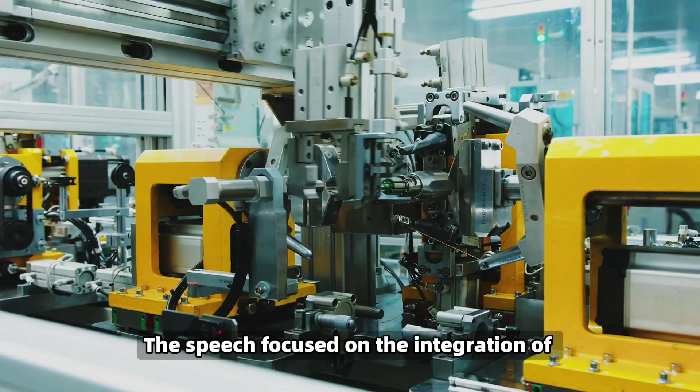The speech focused on the integration of industrial collaborative robots and AI technology, analyzing the challenges facing the robotics field and the development opportunities brought about by the demands of various industries.

Since then, Professor Kosuge has continued to expand in this direction, extending collaborative robot technology from rigid industrial assembly to the more challenging field of flexible manufacturing.

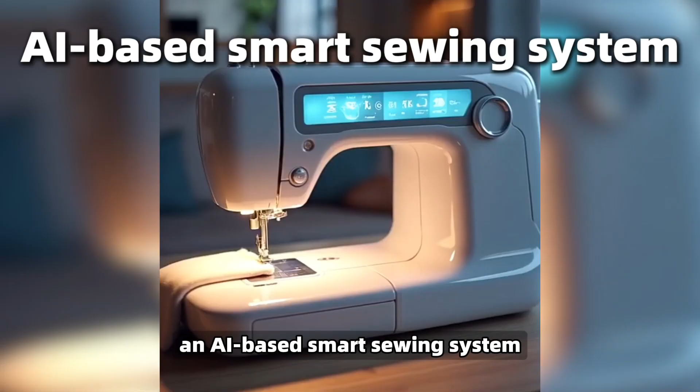At the upcoming GAIR 2025 summit, Professor Kosuge will present his latest research findings, an AI-based smart sewing system. This research continues his team's deep understanding of physical human-robot interaction and aims to solve the labor shortages and automation

bottlenecks facing the global garment manufacturing industry. The sewing robot developed by Professor Kosuge demonstrates several breakthrough technical features.

First, the system employs a fixture-free 2D sewing technology, using AI algorithms to automatically sew parts of 2D garment while keeping the fabric smooth and wrinkle-free.

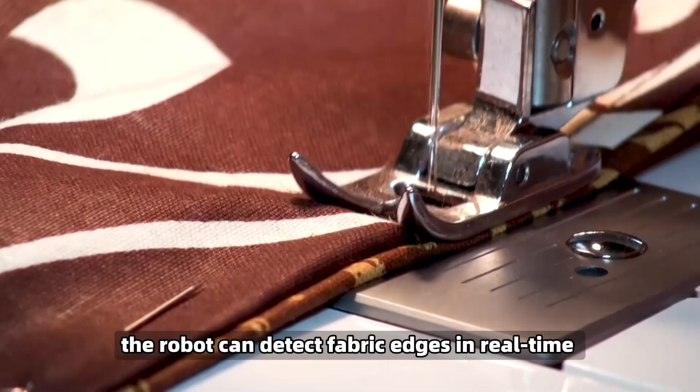Second, through an innovative mechanism and optical sensors, the robot can detect fabric edges in real time and precisely control the sewing direction. Third, the system can be used without programming, allowing for rapid switching between different styles, sizes, and

fabrics without the need for large-scale changes of molds or fixtures, making it particularly suitable for high-mix, low-volume flexible production.

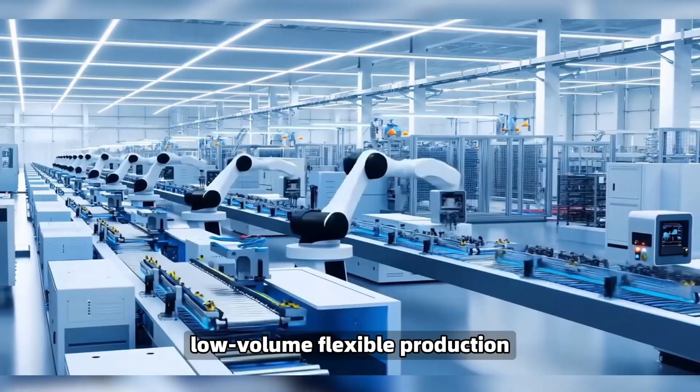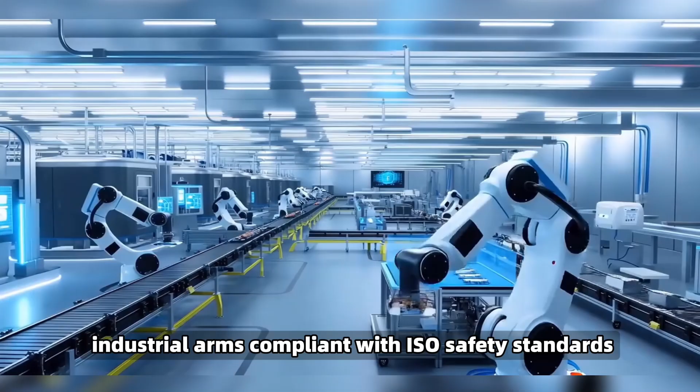Finally, as a smart system for handling soft materials, its core sewing mechanism is enclosed within the machine, while external collaboration is performed by industrial arms compliant with ISO safety standards, ensuring safety in human-robot coexistence.

On the eve of GAIR 2025, Leiphone interviewed Professor Kosuge at the University of Hong Kong. The former IEEE RAS president chose to move to Hong Kong 4.5 years ago, recognizing its unique position as a hub connecting global innovation resources with the global manufacturing ecosystem.

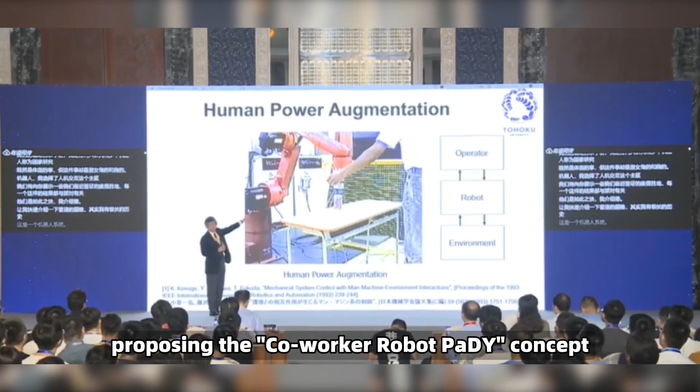In the 6 years since his 2019 opening speech proposing the coworker robot PaDY concept, his team has finally transformed the vision of fixture-free flexible manufacturing depicted in that speech into a tangible, quantifiable, and commercializable technical entity.

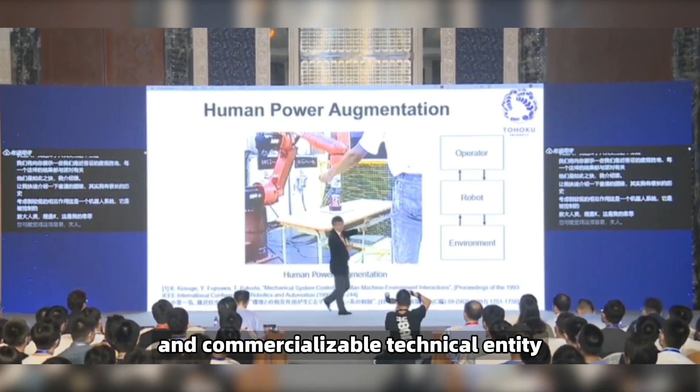During the robotics session at GAIR 2019, Professor Kosuge used a comparison between the bustling streets of Shenzhen and the prediction curve of an aging population to reveal the sharpest contradiction of that era.

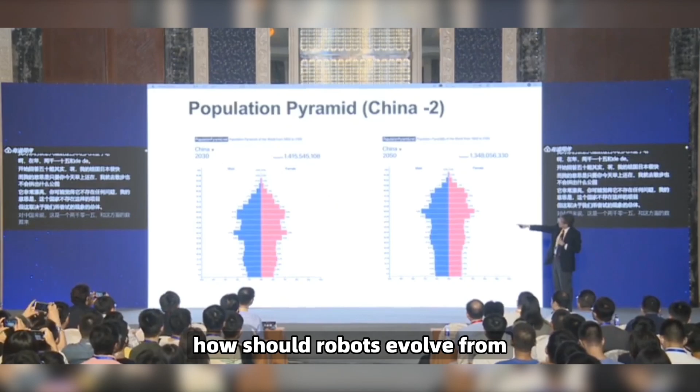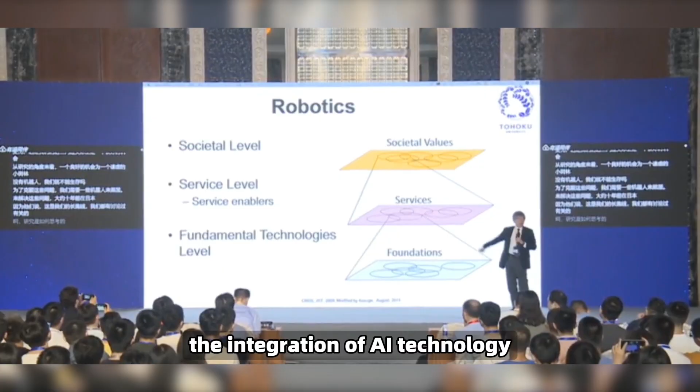When labor shortage becomes an irreversible social trend, how should robots evolve from cold automation equipment into true partners? At that time, his answer was PaDY, an industrial robot framework designed to achieve human-robot collaboration through the integration of AI technology. The core argument of that speech was insightful.

The value of robots should not be limited to replacing repetitive labor, but should reconstruct the future of manufacturing across 3 dimensions: individual empowerment, social value, and international competitiveness.

6 years later, these concepts of programmability and environmental adaptability have taken a concrete form in Professor Kosuge's latest research. But this time, he aimed the technology at garment manufacturing, a field recognized by the global robotics community as the

ultimate challenge in soft material handling. Professor Kosuge explains that the difficulty with soft materials lies in their infinite degrees of freedom.

Before sewing fabric, one must first smooth out the cloth and place it in the proper position, which is also where previous sewing robots struggled.

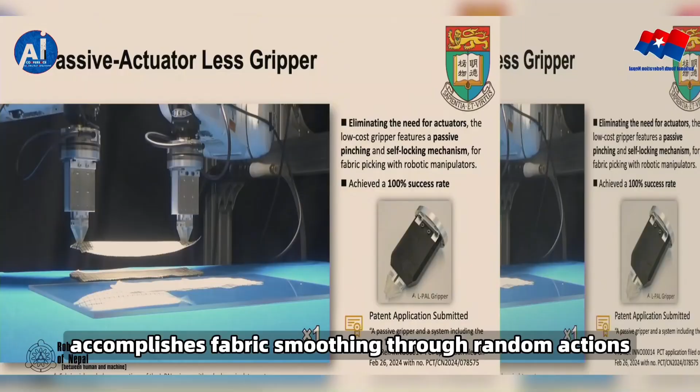Professor Kosuge's sewing robot, however, accomplishes fabric smoothing through random actions. This is a stochastic process, and as the system is trained, they eventually learn how to smooth out these fabrics.

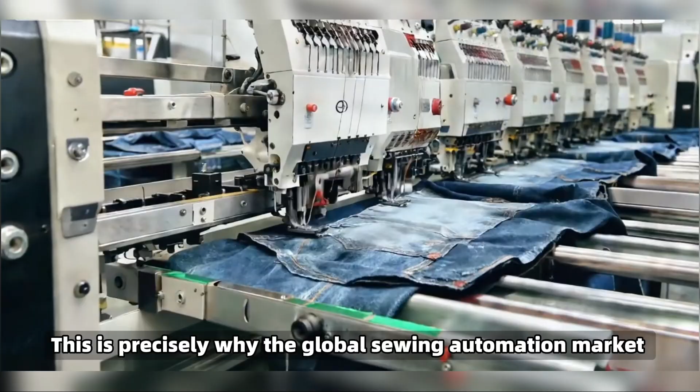This is precisely why the global sewing automation market still hovers at a single-digit automation rate in 2025.

Professor Kosuge's team found in their research that even established industrial sewing giants in Germany and Japan rely heavily on template programming for their solutions.

Even for high-value-added products like car seat covers, engineers need to spend weeks debugging trajectories, and the cost of changing fixtures remains high. In contrast, at efficiency-first contract factories in

Dongguan, the first sample of the same product might be completed in just a few hours. Based on this, Professor Kosuge defined the goal of the Sewing DX project to research and develop key technologies for fixture-free and training-free operation in sewing and fabric processing.

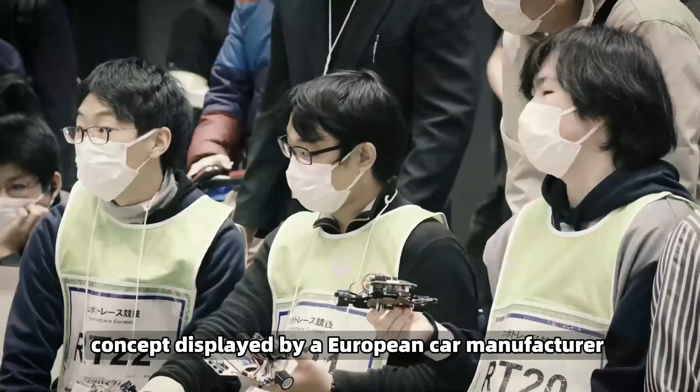In 2022, when Professor Kosuge saw a smart cockpit concept displayed by a European car manufacturer at the International Robot Exhibition in Tokyo, he realized that car seat covers might be the best entry point to break this paradox.

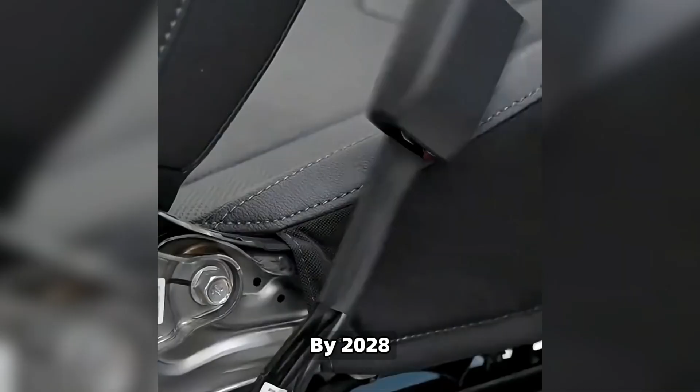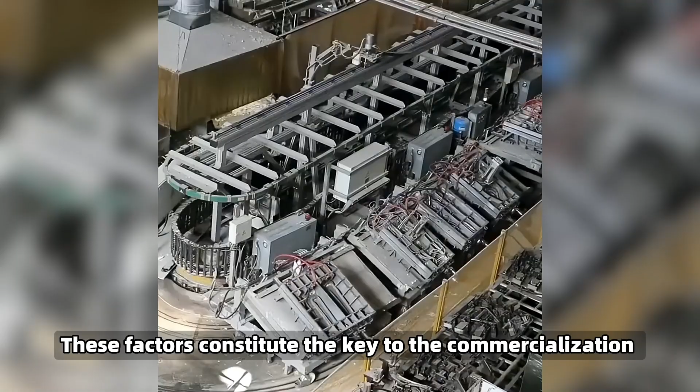By 2028, the global automotive seat market is expected to approach $3 billion, with the sewing equipment market alone reaching $363 million. More importantly, car seat covers have three unique attributes: high production volume, high product value, and complex 3D curved surfaces that maintain regularity. These factors constitute the key to the commercialization of Professor Kosuge's sewing robot technology.

In the demo area, Kosuge first showed their new gripper, a seemingly simple passive end effector called PAL grip, which embodies a disruptive design philosophy.

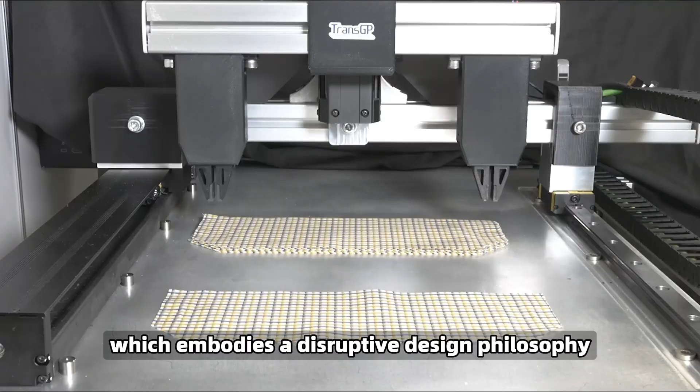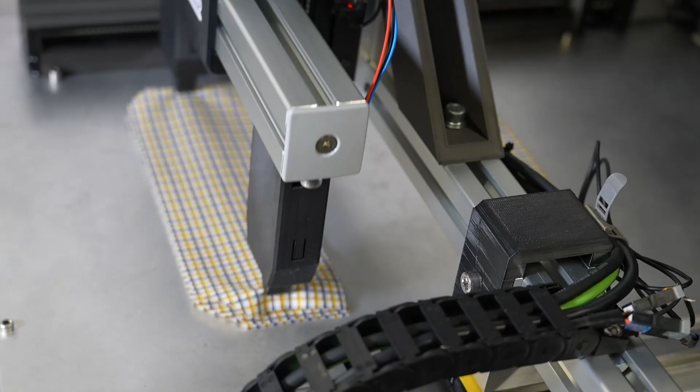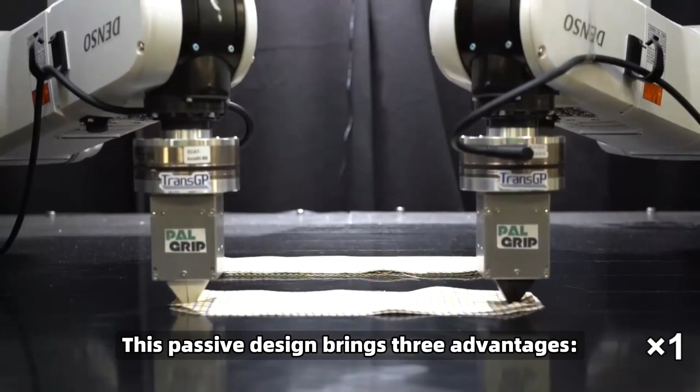When the robot pushes the end effector, the PAL grip, to the top layer of a fabric stack, only the top layer of fabric is picked up while the bottom layer remains in place due to a larger contact area and stronger friction. This passive design brings three advantages: significantly reduced gripper cost, no need for wiring or control signals, and adaptability to dozens of fabrics from cotton to silk by changing fingertip modules.

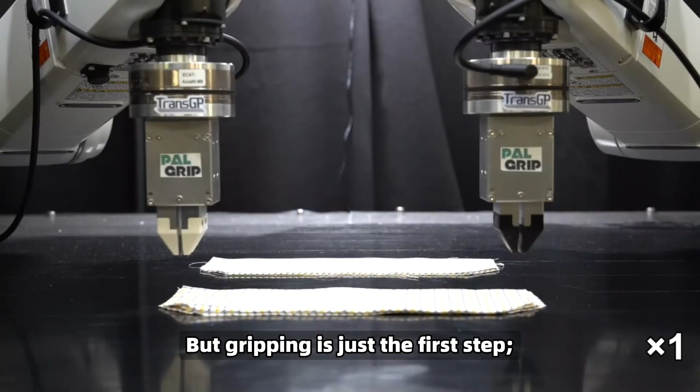But gripping is just the first step. The real challenge lies in aligning two different layers of fabric, such as in sewing scenarios with linings, and eliminating wrinkles. In another video, Kosuge demonstrated how they achieved this.

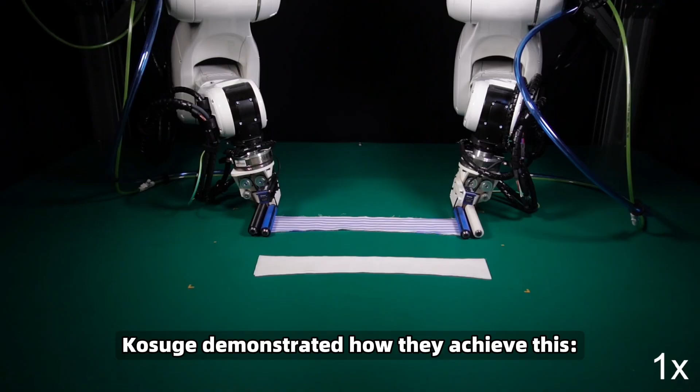A roller integrated with suction ports, actuation ports, and laser thickness sensors picks up fabric from both ends, rolls it up to deliver it to a designated position, and aligns the different fabrics.

With its built-in fault tolerance and recovery system, a laser sensor monitors the thickness of the adsorbed fabric in real time. Once multi-layer adsorption is detected, the system immediately initiates a retry process, releasing suction, adjusting the angle, and readsorbing. Theoretically, the success rate is close to 100%.

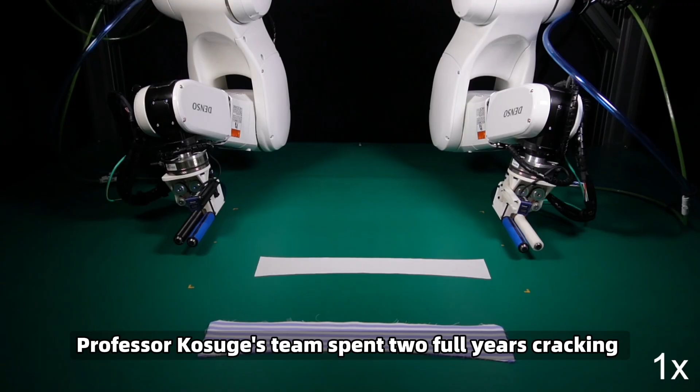The ultimate test of all these front-end technologies is completed by that seemingly ordinary yet sophisticated sewing machine. Professor Kosuge's team spent 2 full years cracking the core control problem of the sewing machine's feeding system.

It can be clearly seen in the video that at the moment tension is released, the originally wrinkled fabric is smoothed out as if by an invisible hand, and the edges align automatically to the predetermined position.

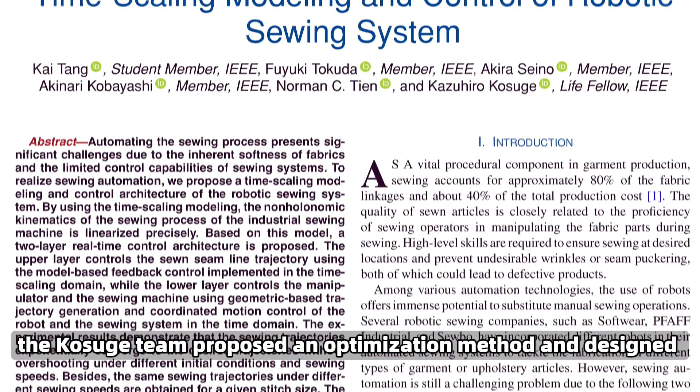In a paper published in IEEE Transactions on Mechatronics, the Kosuge team proposed an optimization method and designed a specialized controller to achieve system linearization, theoretically guaranteeing stability.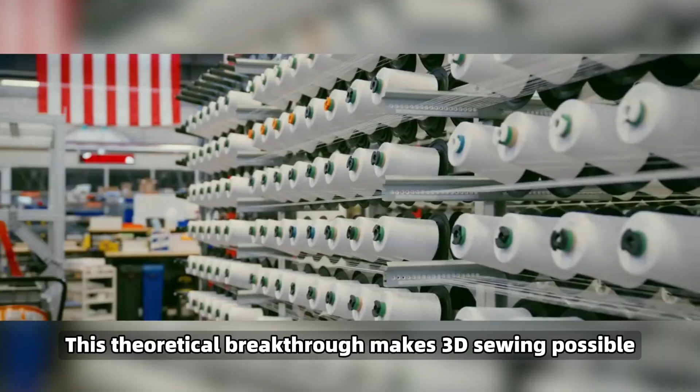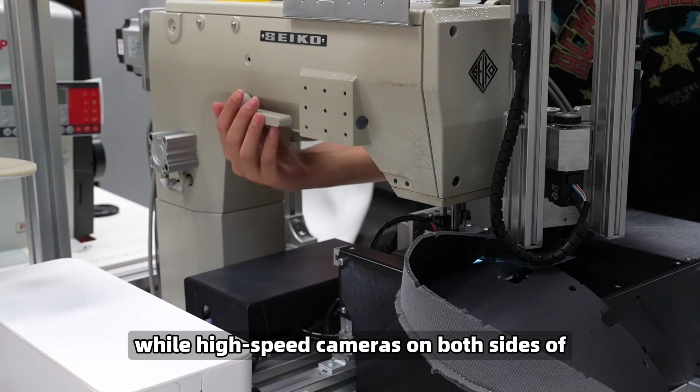In another demonstration simulating the sewing of a car seat cover, the sewing needle traveled along the curved edge at a speed of 20 stitches per second, while high-speed cameras on both sides of the machine head continuously detected the fabric edge at a frequency of 120 Hz.

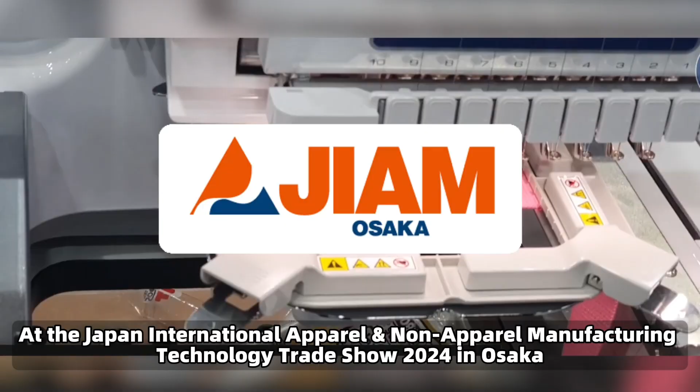At the Japan International Apparel and Non-Apparel Manufacturing Technology Trade Show 2024 in Osaka, Professor Kosuge completed the first public demonstration with this system. Several leading companies, including the EU's largest car seat manufacturer, expressed strong interest.

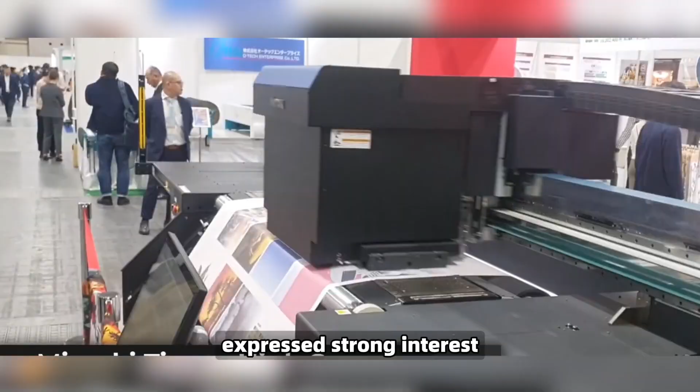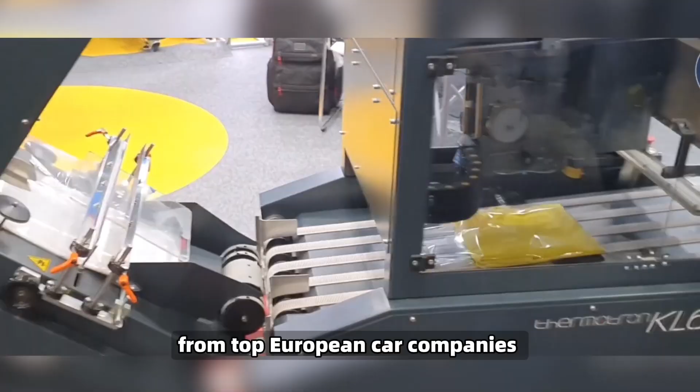Although traditional giants appear cautious in their investment decisions, the technology demonstration has triggered close attention and strategic maneuvering from top European car companies and sewing equipment manufacturers in China and Japan.

The core logic behind the companies' caution is simple yet sharp: if this technology truly has disruptive competitiveness, why haven't other companies deep in the industry for decades achieved it first?

When analyzing the competitive landscape, Professor Kosuge admitted that current fixture-based solutions for sewing robots have dominated the market for over a decade. As vested interests, their business model is built on the sales of NC sewing machines using templates, where revenue is directly linked to system complexity.

This might be the fundamental reason for their reservation towards breakthrough technologies. A more realistic challenge comes from the cost structure.

When asked about the most expensive component of the system, Professor Kosuge told us that the computer system is the costliest part, and that doesn't even include software licensing. In addition, the mechanical structure, sensing system, and controller also represent significant costs.

However, Professor Kosuge insists that the real advantage of the system lies precisely in its ability to disrupt the cost logic of traditional automation equipment. In the interview, he repeatedly emphasized two keywords: no programming and affordable. These two characteristics pave the way for a lightweight business model.

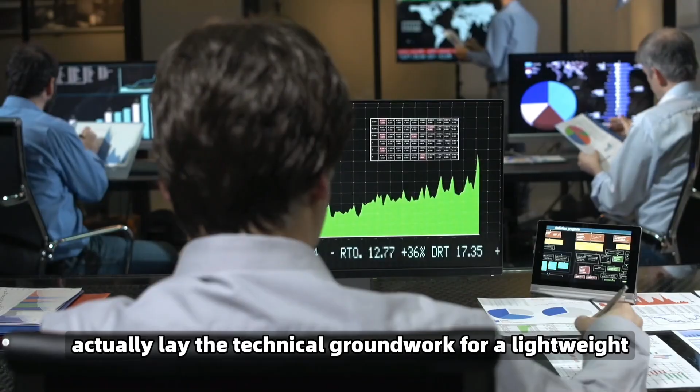A more critical breakthrough may lie in the scalable design of the business model. The system characteristics repeatedly emphasized by Professor Kosuge in the interview—operable without programming and adaptable to different forms of robot hardware—actually lay the technical groundwork for a lightweight pay-as-you-go business model. This technical architecture leaves room for more flexible business models.

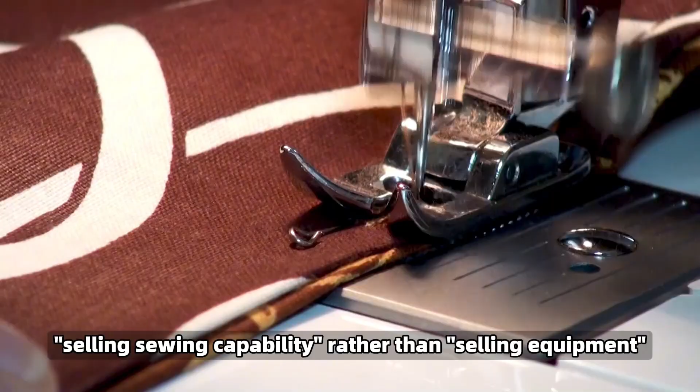In the future, it is even expected to adopt a service model of selling sewing capability rather than selling equipment. Factories do not need to invest huge sums of money to purchase the entire system at once but pay service fees based on actual sewing volume. Under this model, corporate decision-making costs will be significantly reduced, and barriers to system adoption will crumble.

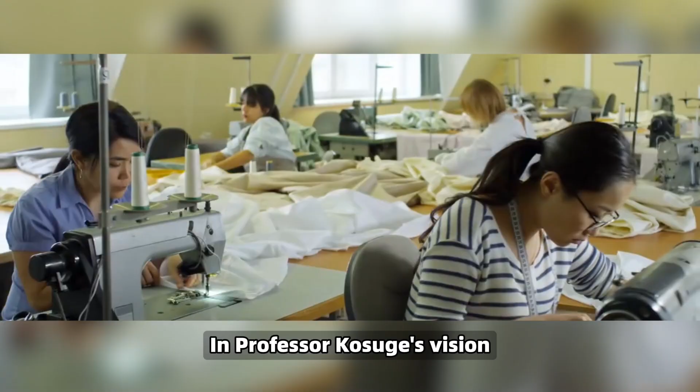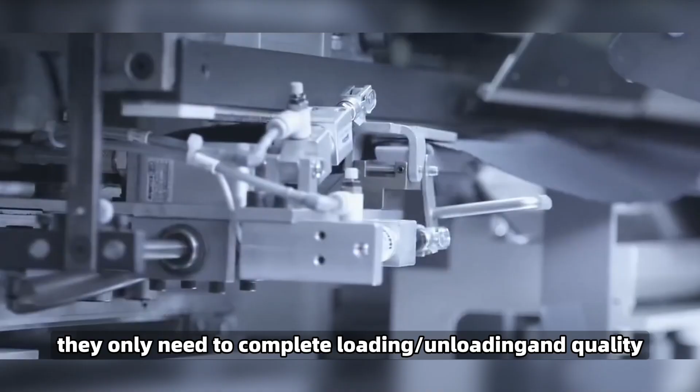In Professor Kosuge's vision, sewing robots are not meant to replace sewing workers but to empower them. In the future, they won't need to master complex sewing skills. They only need to complete loading/unloading and quality inspection to keep machines producing 24 hours a day. As he said in the interview, their goal is to empower workers, not reduce them.

Despite the bright technological prospects, Professor Kosuge still faces severe challenges. First is the limit of the technology itself. The team is trying to use transformer models to solve the dynamic planning problem of soft fabrics, but collecting training data is extremely difficult. The friction coefficient and elastic modulus of every piece of fabric are different, and traditional simulation cannot reproduce the complexity of the real world.

Second is the game of capital and talent. Professor Kosuge plans to complete financing as soon as possible to recruit software and mechanical engineers and achieve the output of the first batch of products within 1 to 2 years.

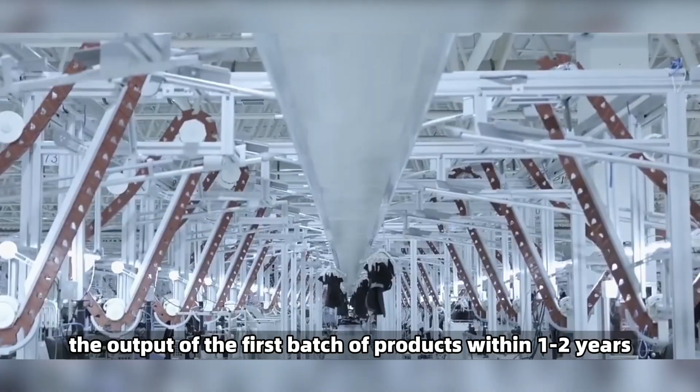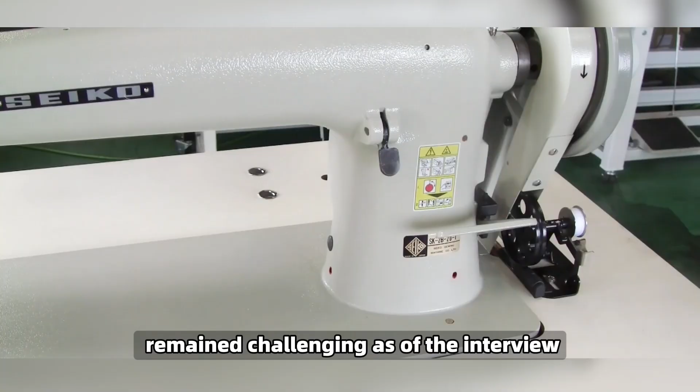Finally, there's market acceptance. While the 2024 Osaka demonstration attracted interest from several companies, converting that interest into investment remained challenging. As of the interview, Professor Kosuge remains patient, believing that although the decision-making cycle in manufacturing is long, the market window won't wait indefinitely.

The market analysis he presented shows that minimum wage levels in EU countries continue to rise, and labor costs in traditionally low-cost regions like Slovenia and Romania are also growing rapidly.

At the end of the interview, Professor Kosuge insisted on taking us to another building to see the complete system demonstration. Walking through the corridors of HKU's Centennial campus, the setting sun cast long shadows, much like this 4-plus-year journey of R&D. In the lab, a sewing machine was sewing a car seat cover sample at a speed of 20 stitches per second.

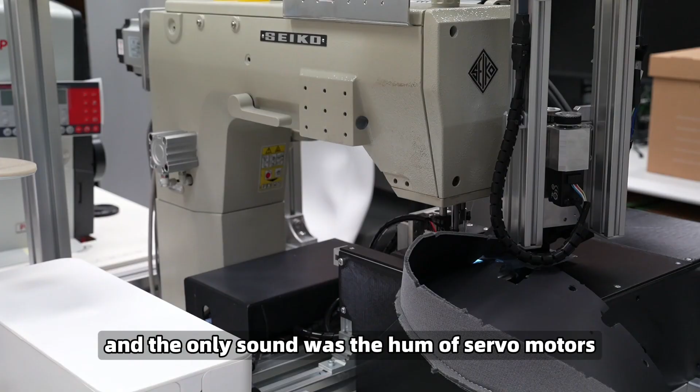The robotic arm gently flipped and aligned the 3D curved fabric, and the only sound was the hum of servo motors. When the final product was handed to us, its quality was virtually indistinguishable from manual sewing by a technician.

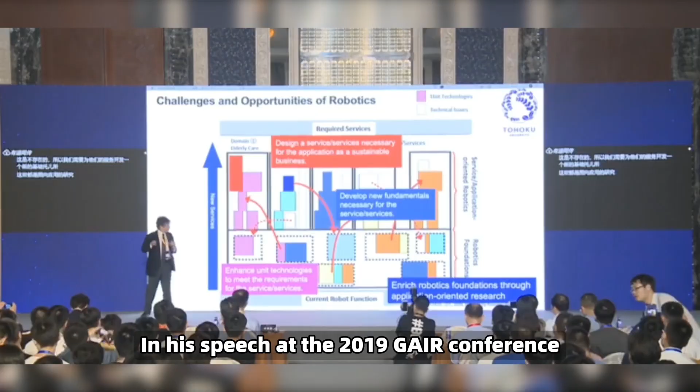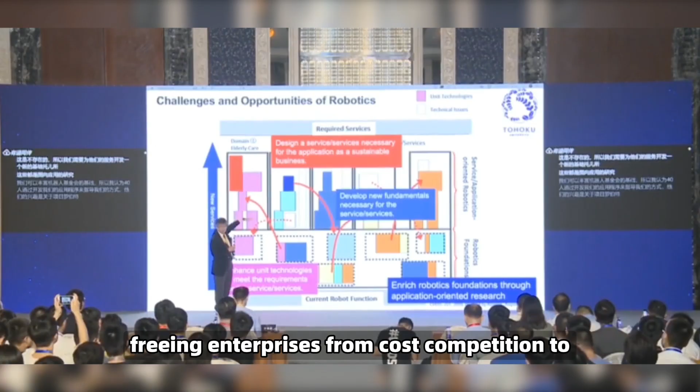In his speech at the 2019 GAIR conference, Professor Kosuge stated that robots should make manufacturing more human. Today, we see this humanity manifested in liberating workers from repetitive labor to do more creative work, freeing enterprises from cost competition to pursue higher quality development, and allowing society to move beyond demographic anxiety to embrace a technology-empowered future.

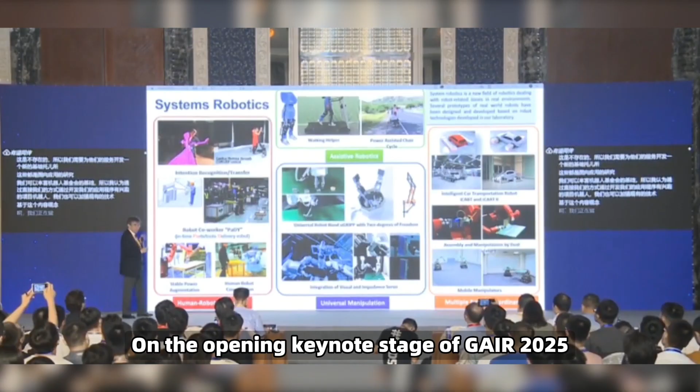On the opening keynote stage of GAIR 2025, Professor Kosuge will present the sewing robot to the world, showcasing the 6-year promise of the IEEE RAS president.

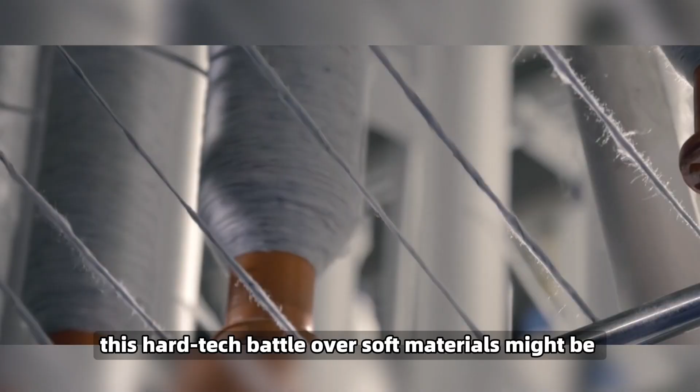From PaDY to smart sewing, from collaborative concepts to commercial entities, from Hong Kong labs to world factories, this hard-tech battle over soft materials might be a microcosm of China's transition to intelligent manufacturing.

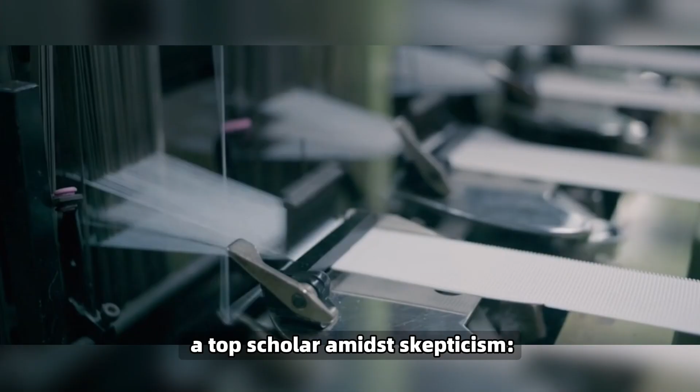In this transformation, what is most valuable is the persistence of a top scholar amidst skepticism. True innovation lies not in the complexity of technology, but in whether it allows the most ordinary laborers to share the dividends of technological progress.